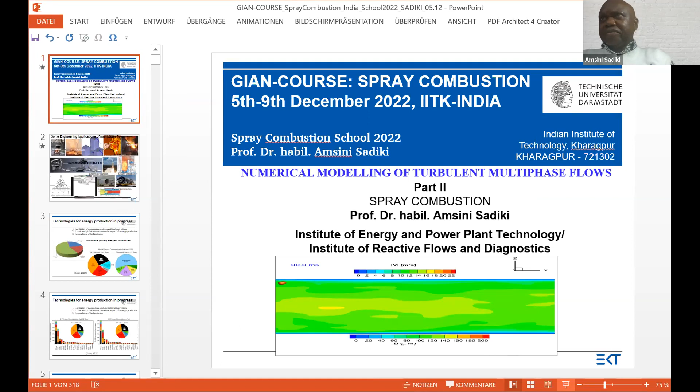I have tried not to present our university here, I think it is well known, the Technische Universitat Darmstadt. If it is wished, I can present it later.

We will focus on the spray combustion school. This school will focus on different topics we have to share together, and I will put at the end also some issues concerning multi-phase flow combustion, not only spray combustion.

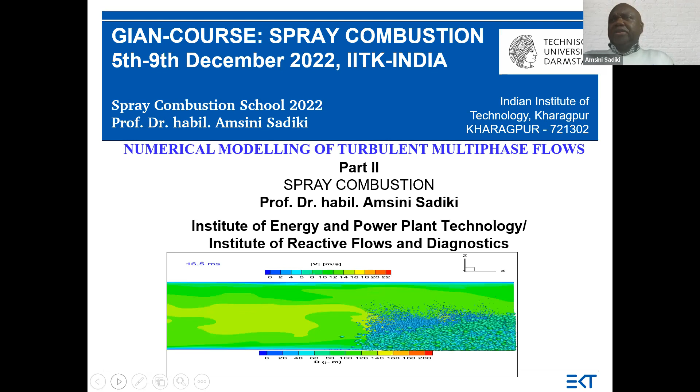Let me start a little bit with this movie here. So we see spray, and from this spray we see that it is a really complex process: from atomization and spray formation, dispersion, evaporation, and also at the end - which I have not shown here - combustion and also some radiation processes. This kind of phenomena can be found in different applications.

We see here, for example, the biomass application. We see also the pollutant formation in the atmosphere and from buildings. We see here also in medicine, in metal processing. We see also here in engine propulsion, in aerospace for steam generation and energy generation, like here for stationary gas turbine and aircraft. And we see here also in transportation on road, in ships, and some other applications, for example cooling processes. So we can find it also in IC engines and also in some kind of after-treatment, exhaust after-treatment.

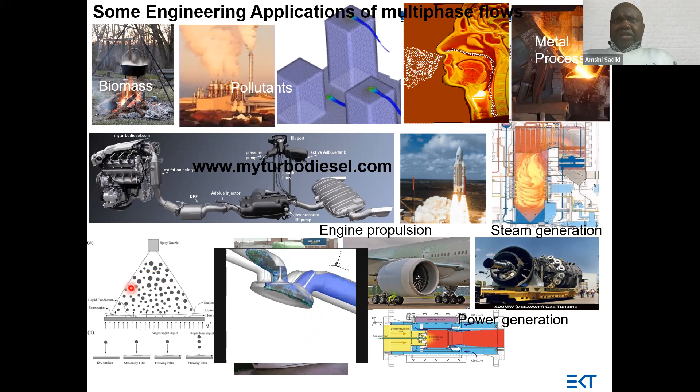So, focusing on energy production, as I said, we see that the resources of energy sources are very limited, and this leads to some problems in the world. You know, there are some geopolitical restrictions, and also transforming these primary energy resources to energy brings also local and global environmental impact, which is related to pollution.

So this led to innovations of technologies, and this brings great progress in this field. So we can see here that the global energy consumption is very high, and if these resources are really limited, then we can see that there is really a problem with this, and that is why at the moment there is some development related to renewable energy.

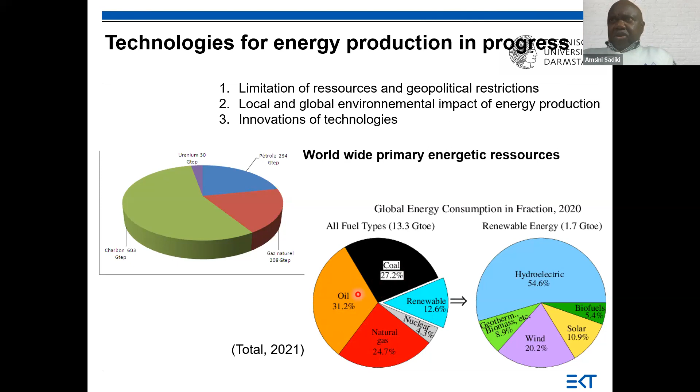So now there is almost 12.6% of renewable energy which is consumed. But the most part, oil, coal, and natural gas, as produced naturally, are transformed by using combustion, and that is what we will show in a few minutes.

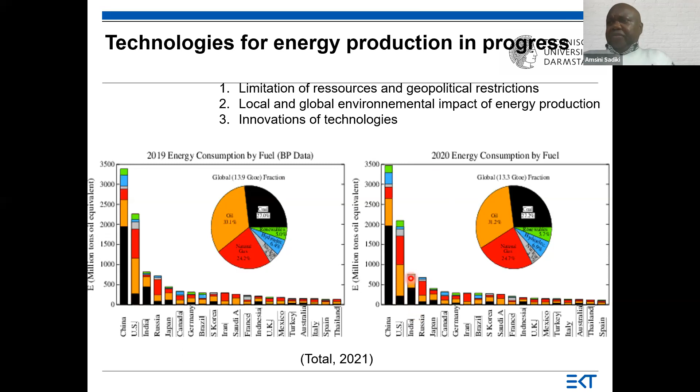So that is a country, and we see that India is also a big consumer of energy, in 2019 and then 2020. So there is a great augmentation of consumption of energy, and this is the energy produced by fuels. And if we put it from 1900 to 2020, so we see that the ratio of production or consumption of energy is increasing.

But to transform this fuel into energy, we need a conversion means by combustion. This means that we have to use combustion to transform or produce energy from this kind of fuels that can be coal, that can be oil, that can be also gas in this area. So we have to use combustion. That is why combustion will remain the main conversion technology with respect to energy production.

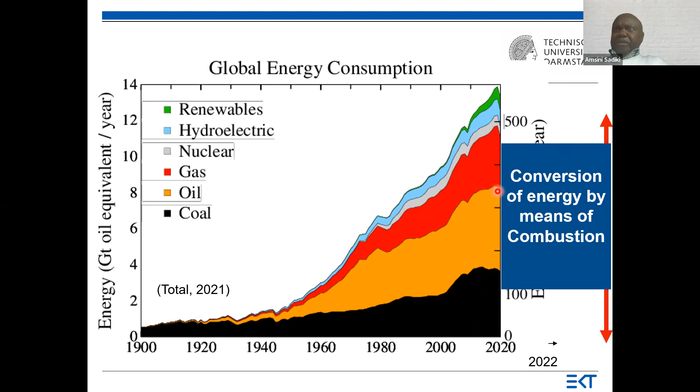And it is why also, if we see here, the percentage of oil and coal, where we can have two-phase flow, is very high. That is why we will focus on this multi-phase flow. So that is what we have seen at the beginning.

So we have 5 days to go through these topics, and we will start today with more general issues of multi-phase flow, and then we will try to characterize spray and microprocesses, using sprays as a representative of multi-phase flow. Tomorrow we will continue with liquid atomization and spray structure, and also try to start with turbulence and turbulent combustion, because the next day we will focus on the phase change phenomena and the mixture formation, which is related to turbulence and is a subsequent process to liquid atomization and spray structure.

Then we will focus on spray transport, interphase coupling dynamics. At the end, Thursday, we will focus on turbulence and turbulent combustion, and also then turbulent spray combustion. And at the end, I will give some examples, some applications, and also the turbulent dispersed multi-phase combustion at the end, but I have not written it here.

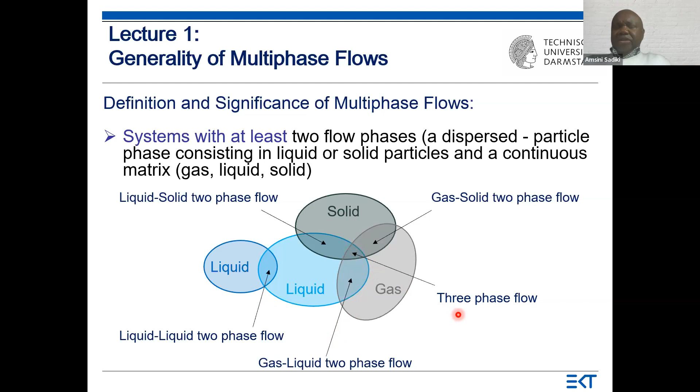Why is this important? So we have economical significance and cost effectivity, because about 70% of all products from chemistry industries are marketed in this dispersed form. It is why this is very important. And at the moment, we have this trend of nanotechnology. And if we look at this production of energy, what we have seen at the beginning of electricity, 4 to 5% of the produced electrical energy is used for milling of particles.

This particle can be solid or liquid. We can characterize these multiphase flows in terms of properties, for example properties of particles: size distribution, the form of the particle, the surface of the particle, and structures, such as pores or whether particles are single component or multi-component. We can also distinguish them by particle motion within the flowing carrier phase, the continuous phase. As we have seen, we have a velocity distribution of particles and fluctuations. We also have some integral quantities for describing particle fraction in the flowing carrier phase. We will introduce the phase volume fraction and the mass loading, and we will find these naturally in various application fields.

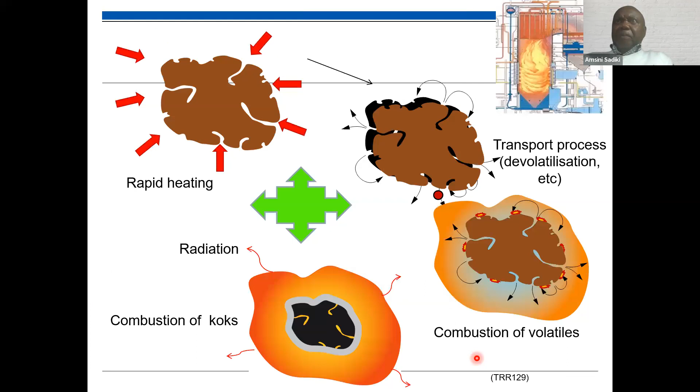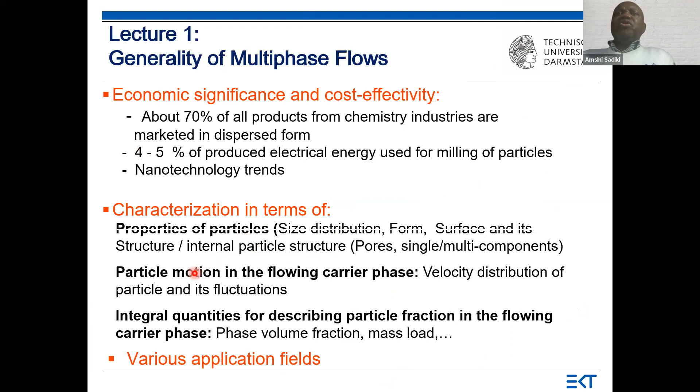This brings me to categorization of flow systems. We have seen the properties of particles. Now I will show how we can categorize multiphase systems based on the particle motion or the geometry of the system. If we have these flow conditions, the interface of the phases and the topology distribution of each phase should be considered when categorizing multiphase flow systems.

For example, at the beginning we have a liquid phase flowing in a laminar flow, and we have a change of thermodynamical properties within it, and then we have gas bubbles forming. If we also have some change in the motion, we can have liquid droplets, and this kind of system is called the transient multiphase system regime.

But we can also have what we see almost everywhere: a gas phase and a liquid phase separated by a clear interface, and this interface can be followed and captured. Here we have large bubbles, and we also have liquid within, gas phase here, and liquid flow here. We can still follow and track this interface, and in this case we have the so-called separated two-phase flow regime.

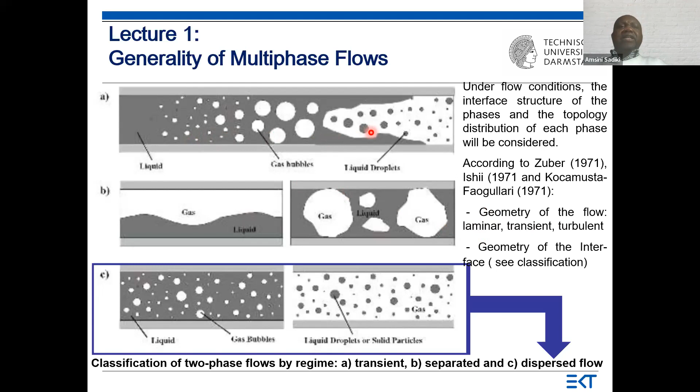Based on the flow characteristic, we will speak about laminar, transient, and turbulent flow. We will introduce the Reynolds number of particles and some other non-dimensional numbers to characterize these two-phase flows. Here are some applications.

If we have multi-phase flow in industrial and technical applications, we can find this series of compositions. So we have gas-solid flow, for example, as made in pneumatic conveying, particle separation in cyclones like this one, filters, and fluidized beds.

We have also liquid-solid flow, as in hydraulic conveying, liquid-solid separation, and particle dispersion in stirred vessels.

We have also gas-droplet flows in spray drying, spray cooling, as I have shown you before in one example, spray painting, and spray scrubbers.

We have also liquid droplets, if we have mixing of immiscible liquids or extraction in the chemical industry. Liquid-gas flow as we found in bubble columns in some power plants, aeration of sewage water, and flotation.

But to be very concentrated on one application, we will focus on turbulent spray combustion. And at the end, we will show also some other applications related to turbulent solid combustion.

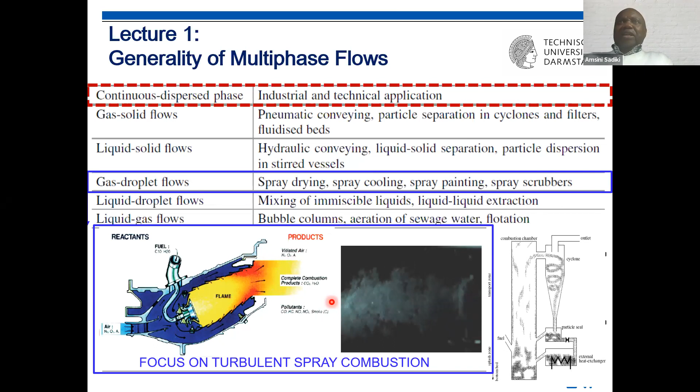So this is what we will focus on, and the question is why. We will focus on this because spray combustion is a powerful method of burning relatively involatile liquid fuels.

Why will we focus on liquid or solid in the multi-phase context? Because there is ease of fuel handling, and we can store them much easier. Also, they have a high energy content. All these properties make liquid fuel and solid fuel very attractive for many applications.

And in this area, in the application of energy generation, this is very, very interesting. We can find this application, for example, in transportation purposes: diesel and gasoline engines, heavy engines for road vehicles and ships, and also in aviation, marine and land-based gas turbines, and in space rockets, etc.

And what is the fundamental process here? We have liquid at the beginning, and the key process is the disintegration or atomization of this liquid to produce a spray of small droplets, increasing the surface area so that the rate of heat and mass transfer during combustion are greatly enhanced.

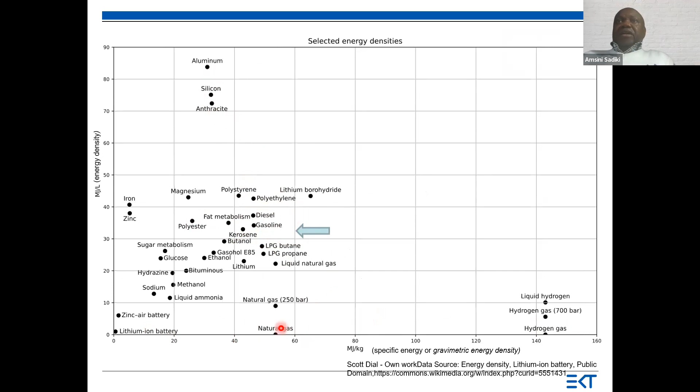And we can now say that because spray formation here is the key process, it plays a strong role, or it influences the mixing and consequently the combustion process. So the combustion process we get here is different from what we found in gaseous combustion applications. This influence is very critical in the spray system, and it is a challenge to optimize the combustion process.

And for that, we need also spray simulation tools, which are able to support such kind of development or optimization. Here I show you a short example. So we have our burner here.

So the spray is spraying, building what we have seen before, with different regions. We will see now these regions: we have small droplets, they evaporate, and this evaporation builds the mixture. This mixture reaches the stoichiometric condition, so that we have this kind of flame, which is different from what we know as a premixed flame or a diffusion flame. And that is exactly what I told you before.

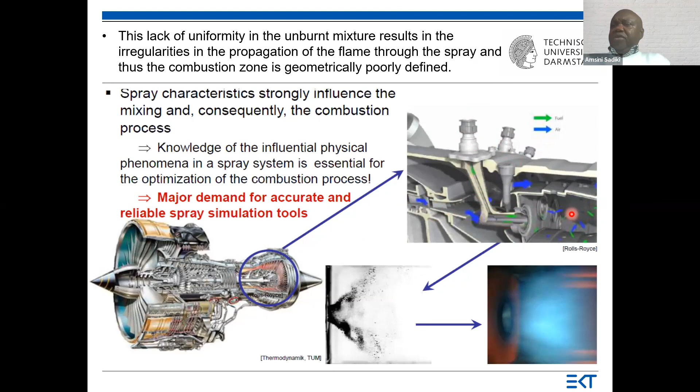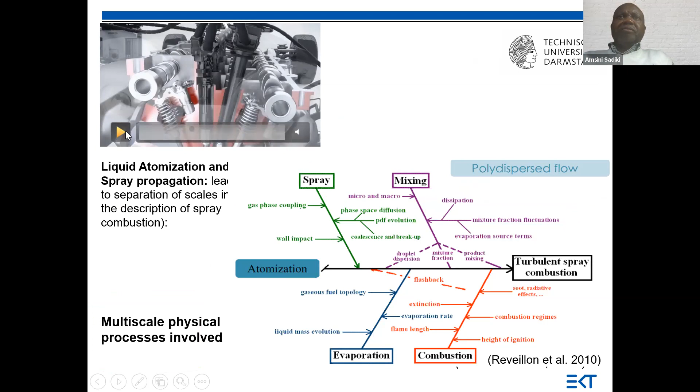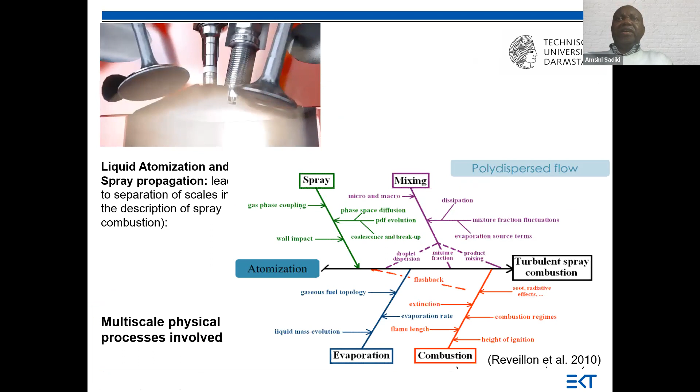We have fuel and air which come from the compressor. The fuel enters here, and we have the formation of mixing within this combustion chamber. The phenomena that take place are atomization, primary and secondary, dispersion, and other processes. I show this for the gas turbine, and we can see the same in the case of IC engines. So we have formation of spray, mixture formation, and combustion of spray.

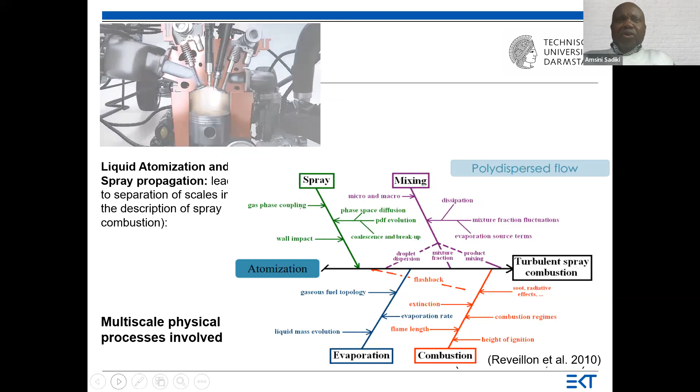The key process, as I said before, is liquid atomization and spray propagation. This leads to separation of scales, which is helpful for describing our process. We are dealing with a multi-scale, multiphasic process.

As we can see in this fine diagram proposed by Reveillon in 2010, we have the spray which is atomized and builds up at the beginning. Within the spray we have coupling of spray with the gas phase, phase space diffusion, PDF formation, and evolution of these droplets. We have coalescence and also breakup, primary and secondary, and we can also have interaction of the spray with the wall, leading to mixture formation.

During this mixture formation, we have micro and macro mixing, droplet dispersion, and formation of mixture fraction, which we can track by defining some mixture fraction. We have the product of mixing, and turbulent spray combustion at the end. This combustion has different properties, and we can follow the mixture by describing the liquid mass evolution.

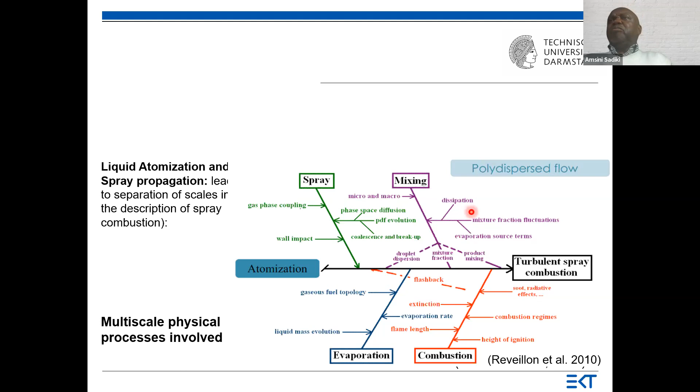I say that we focus on dispersed flow, and I call it polydispersed because the size of droplets within the system is not the same for all droplets. We have not to deal with monodispersed flow, but with polydispersed flow, as I showed you at the beginning.

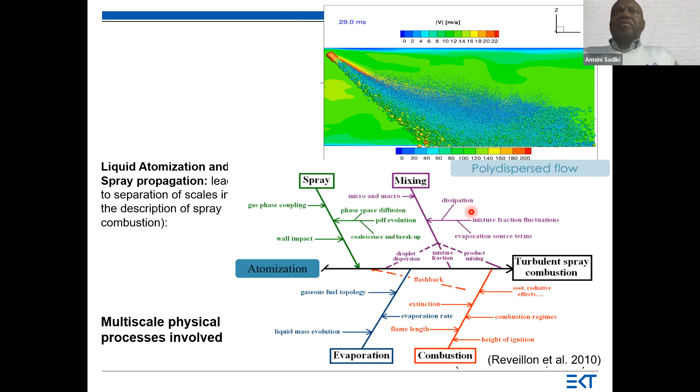Which kind of atomizer we use will be seen in the next chapter.

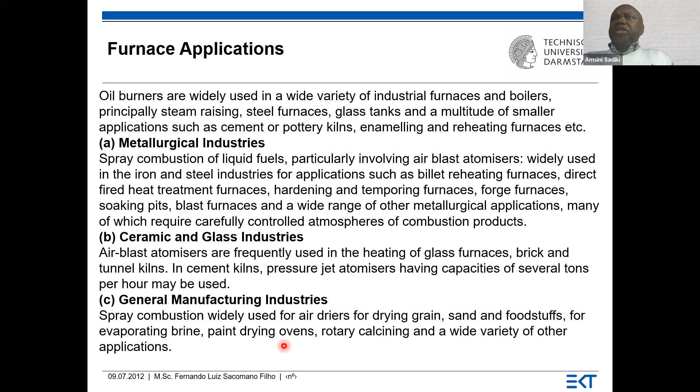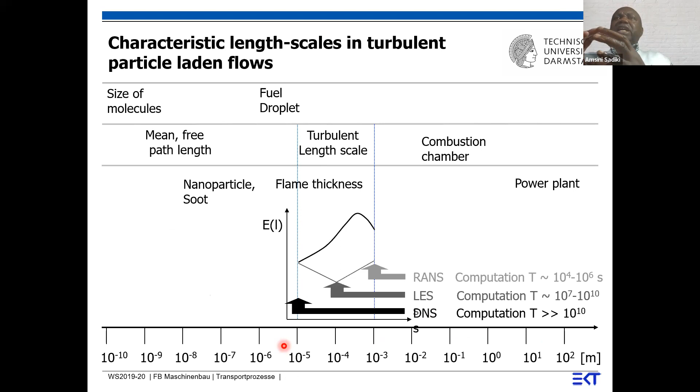As I told you before, through disintegration and spray atomization we generate different sizes of particles. These different particles of different sizes are flowing within a turbulent flow, and within this turbulent flow we have also different scales.

We have the fuel droplets, which are in this range of magnitude, millimeters, micrometers. We have the turbulent length scales, in this range of magnitude. The flame thickness is on the order of millimeters. The combustion chamber itself has this range of magnitude, and the power plants are very large, 10 or 100 meters.

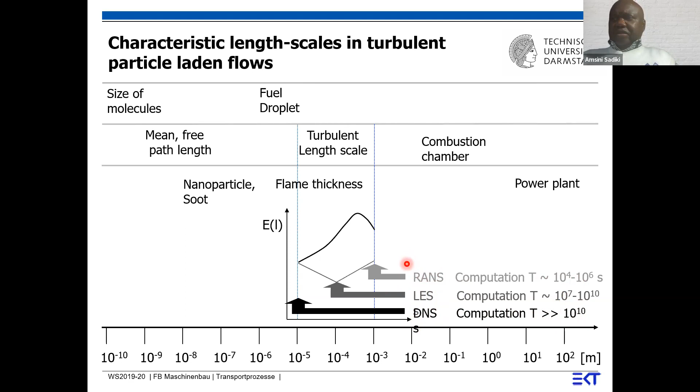It is why we will focus - I will show you some DNS results, I will focus on LES and some examples of RANS. But for that, we need to move now to the next part to characterize our spray and see what kind of microprocesses take place within such processes.

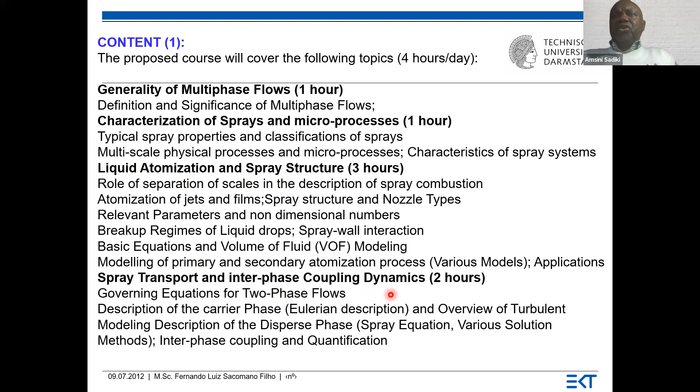Going through these different chapters, we will start with the characterization of sprays and microprocesses. I made a slight modification here, and liquid atomization will follow this. After that, we will focus on transport and inter-phase coupling dynamics, and then continue at the end with turbulent spray combustion.

We'll focus on numerical description techniques of turbulent dispersed spray or solid combustion, and different methodologies - Eulerian Lagrangian, and also Eulerian-Eulerian. We'll go through different modeling approaches, and I will show you how we can use PDF modeling approaches to describe multiphase processes and multiphase flow combustion.

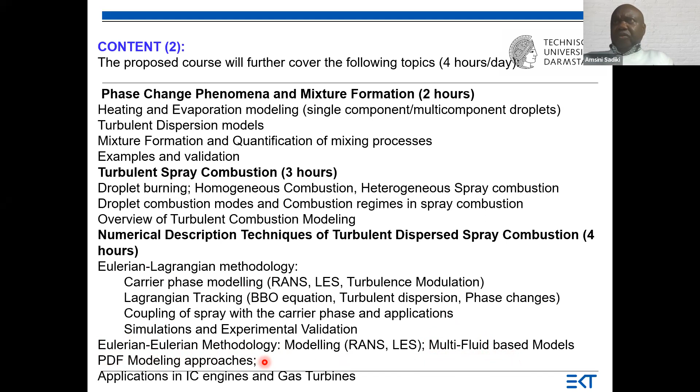Some remarks: we will have this lecture in 16 hours, and the objective is to teach you especially the fundamentals of spray combustion. At the end of this lecture you will be able to identify the role of the interacting multi-scale processes that govern spray evolution downstream from the near-injector atomization region in liquid fueled combustion systems, and you'll be able to choose a suitable method for numerically simulating spray propagation, evolution, and combustion, including interaction between spray and wall.

You will also be aware of the experimental validation issues, because I will speak about comparison of numerical and experimental results. And we'll speak about the modern approaches in the field of turbulent spray combustion or turbulent spray combustion.

I am sure that you have the correct prerequisites in continuum mechanics. By continuum mechanics I understand also thermodynamics and some idea about turbulence modeling, but you will get a recall of these in lectures by Professor Schocker, and you must have, I think not deep, but some background in combustion.

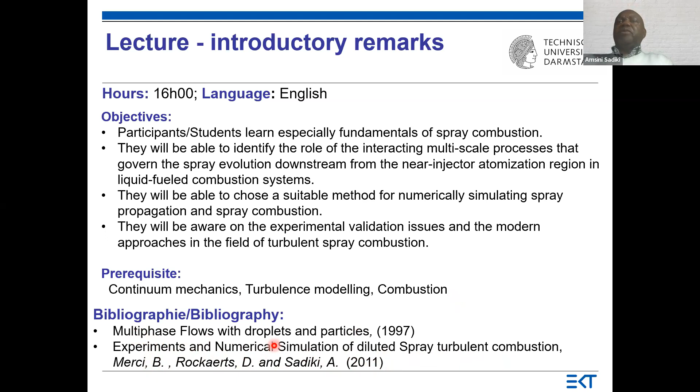For bibliography, I use our book: Experiment and Numerical Simulation of Dilute Spray Turbulent Combustion, written in 2011 with Dirk and Bart Merci. We also use Multiphase Flow with Droplets and Particles by Crowe, Sommerfeld and Tsuji, and Fundamentals of Spray Combustion by Mashayek, as well as some lecture notes on multiphase flow from myself, Martin Sommerfeld and Tsuji, and our 2018 review on primary atomization in propulsive devices and fuel injectors.

So here I show only how we will speak, what we will speak about. We will speak about spray atomization, spray formation, and mixture formation, and also the result of this mixture formation, and chemical reaction and combustion.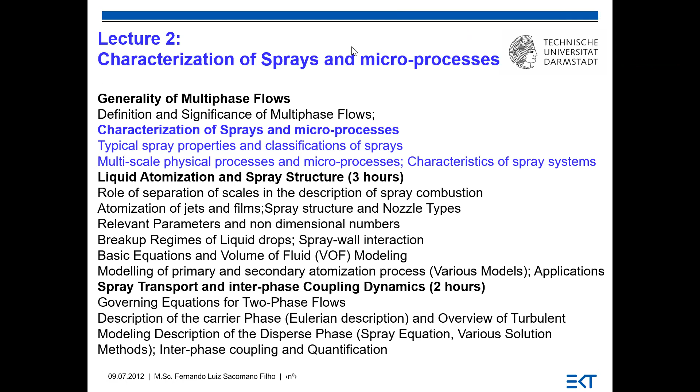So, yeah, there seems to be no question. So, Professor Sadiki, you can continue. Yes, I see here that there is a question.

Can we get the presentation file at the end of the course? I will send it today, and you will get the first part today. The next part we will get tomorrow at the beginning of the lecture, so that you can follow and perhaps put some comments in the files.

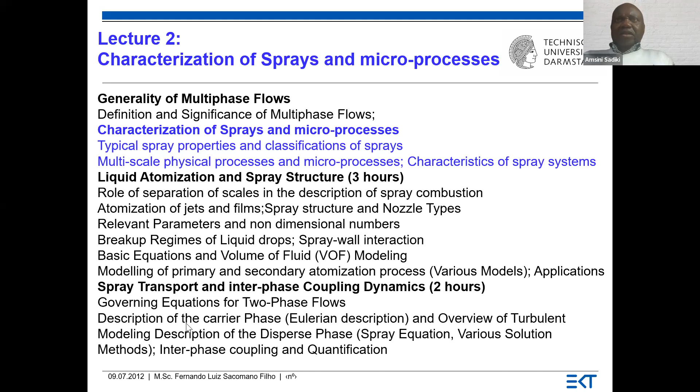Let's now focus on characterization of multiphase flow. So we have our configuration here: the spray, the liquid is spraying here, and we have a formation of disintegration.

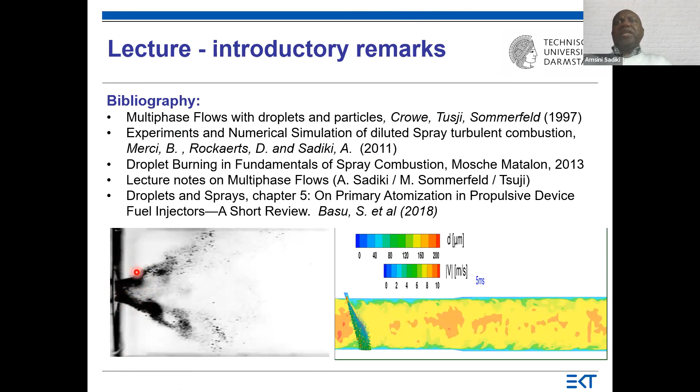We have the disintegration process and the involvement of this process, and we take a small control volume and zoom in to see what is there. We see that it is a polydispersed system: droplets with different sizes, and the gas, which transports or carries these particles. We'll try now to describe this control volume, this system here.

This will help us to understand some things and to speak the same language during this lecture. The first thing is to introduce the volume fraction of particulate phase. I call it particulate phase because this may be solid or droplets, but in this case it is represented by droplets.

So we define this as alpha P, and this alpha P I will call also later phi or pi. It is the volume of the particle divided by the total volume. So the total volume of particles is the volume of each particle multiplied by the number of these particles, summed, and divided by the total volume. We'll do some exercises in which we can see it more clearly.

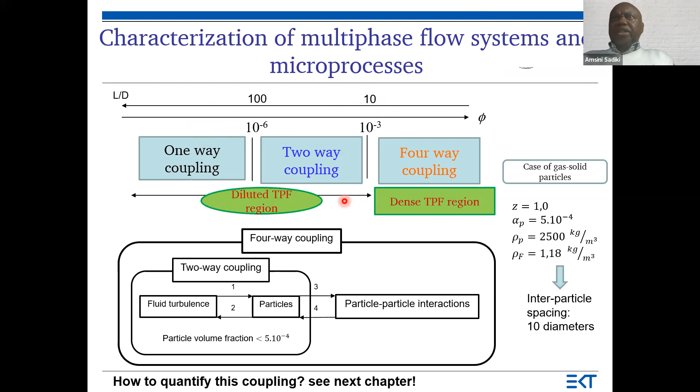This will be seen in the next chapter - we will see this now. This is what we will try to quantify here.

We have the fluid phase or carrier phase, and we have the particulate phase, or droplet phase, or particle phase, and there is interaction between them. Because of this interaction of phases, the phases carry some physical quantities - mass, momentum, and energy. They can also be entropy, or moment of momentum, but here I restrict to these three: mass, momentum, and energy.

Because the particles in the fluid carry these kinds of properties, we have interaction with respect to mass, momentum, and energy. So we can add this complementary information: dilute two-phase flow, dense two-phase flow, one-way coupling, two-way coupling, and four-way coupling. We have spoken about two-way coupling here, but it was not really clear.

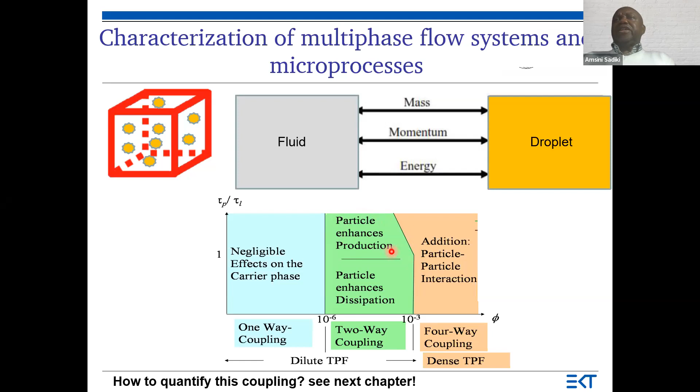And if it is so, this means we have a reduction, or rather an augmentation of the interaction between particles, so that this part will enhance the region of particle-particle interaction. That is why we have this corner here to say that in this case there is also augmentation of particle-particle interaction. That is what I'd like to show.

This comes later, and we can put this together. So we have one-way coupling: the particle follows the fluid phase. We have the two-way coupling: the particle influences the fluid phase, and the fluid phase influences the particle.

And we have the four-way coupling, where we additionally have the interaction between two particles. It was difficult to classify, but we also have the so-called three-way coupling. This is due to the fact that we have two particles.

The first one interacts with the fluid phase and modifies the fluid phase. This one modifies the fluid phase, and we say that this modification also implies modification of the interaction. This influences that, and that influences this - then we have the three-way coupling.

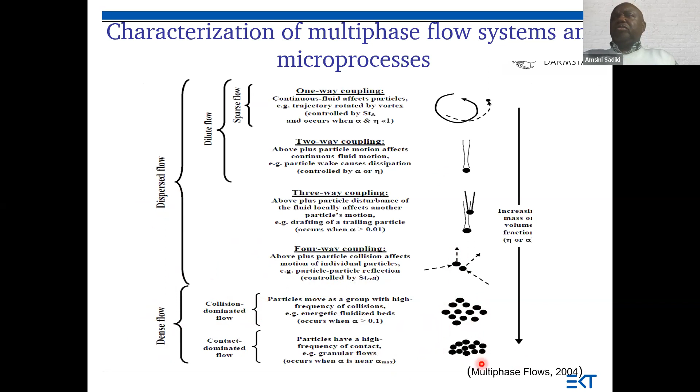So let me now come back to the quantification of these two-phase flow effects. To quantify these effects, we have to introduce some properties, given by the so-called dynamic relaxation time, as I introduced before, and we will have the possibility to define it correctly. By defining it, we will come back to the ratio of the characteristic times.

So we consider that the particle, to be moved, needs forces applied on it - the first one is the drag force. The other forces will be seen later when we characterize the motion in a general way of a particle within the carrier phase. Let us consider only the drag force: this is the drag coefficient. In the volume, we have a mass multiplied by this quantity, and we have the relative velocity.

I will show you how we got this relation in a very nice way. At the moment we can only accept this, so we get this expression. We have a coefficient here, a parameter - the drag coefficient - and the relation of relative velocity: particle velocity minus fluid velocity. We assume our particles are solid particles, and we can put them into this expression.

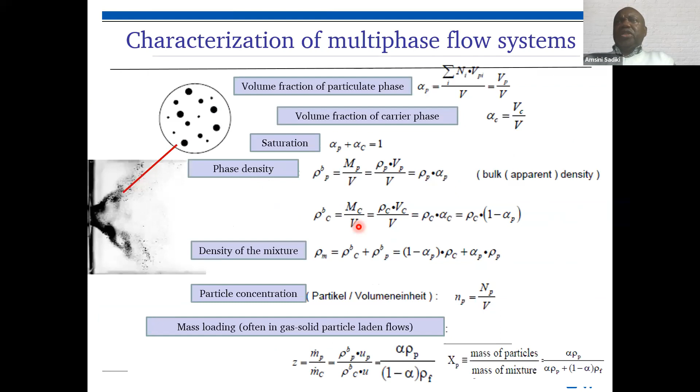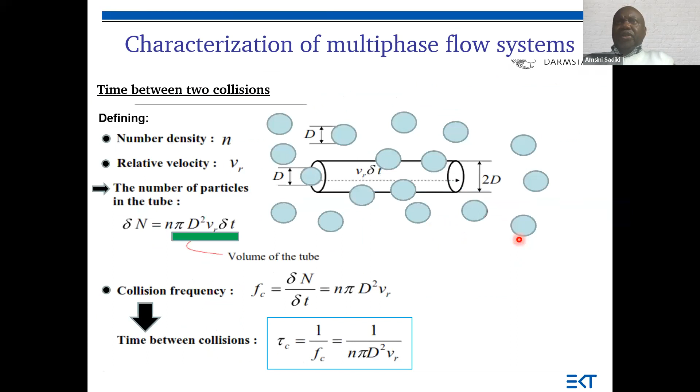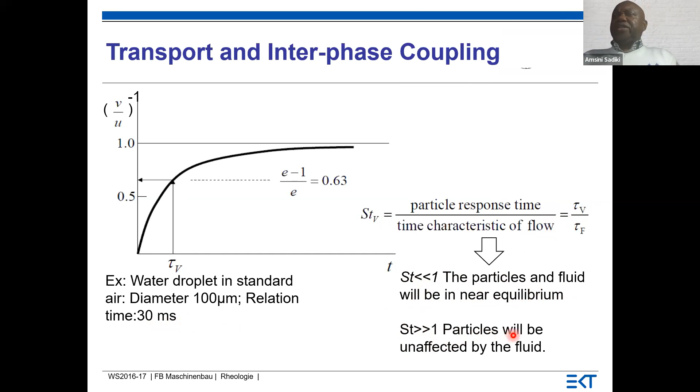And we see here, the Stokes number is related to the momentum, that is why I changed the indices here. So the particle and fluid flow will be near equilibrium, and the particle will follow the flow. If the Stokes number is larger, the particle will be unaffected by the fluid flow, as we see here from tracking the particle trajectory.

So if we have this, we can also introduce another kind of interaction. This is interaction based on momentum. And let me now focus on this interaction based on, if we have phase change, for example, particle evaporation.

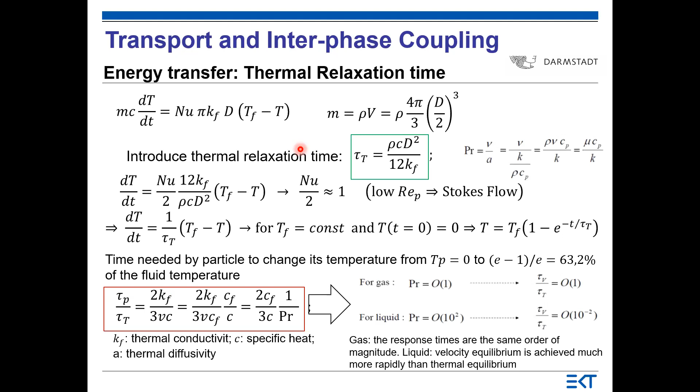And I think it is perhaps time. I don't know, let me know if I can continue or if it's time to close this session. You can continue for another 10 minutes and then take up the question and answer. If it's okay with you, we can go a little beyond that, that's not a problem. So 10-15 minutes, you can go ahead. We have 3 slides to go through, and it can take 10 or 15 minutes.

So if we have phase change like an evaporation process, what occurs there? We have a particle, we have the heat, which is flowing, which is provided to the particle. And we see that the temperature of the particle will change.

And we have a liquid phase, the particle. The heating process will take place within the particle, and some quantity of species will go out. We have the evaporation rate, and here we have some species which will be evaporated from the liquid phase.

So if we have this, what is the process? We have first the heat transfer process, and we have also the heat conduction process. So in the continuous phase, we have the Fourier law, in which we have the thermal conductivity, we have the gradient of the temperature, and we can write this Fourier law for heat conduction.

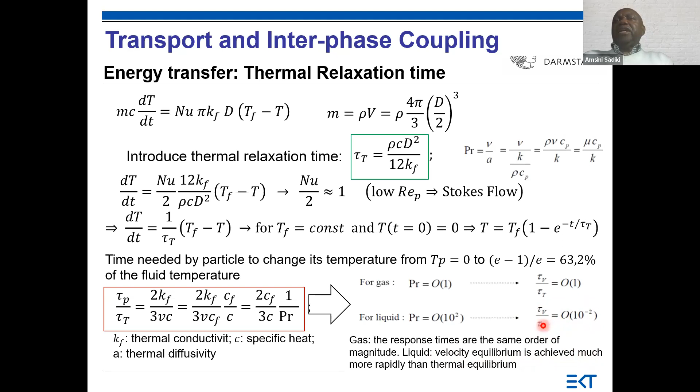So we have these two kinds of relaxation time: the dynamic relaxation time and the thermal relaxation time. These two quantities will help us to quantify correctly the coupling - the mass coupling, the momentum coupling, and the energy coupling.

So let's suppose - I think you will stop me if it is needed. I continue. Yeah, wherever you can bring it to something, then we can take up the questions and answer session. Yes, I think here it is a very good location to stop.

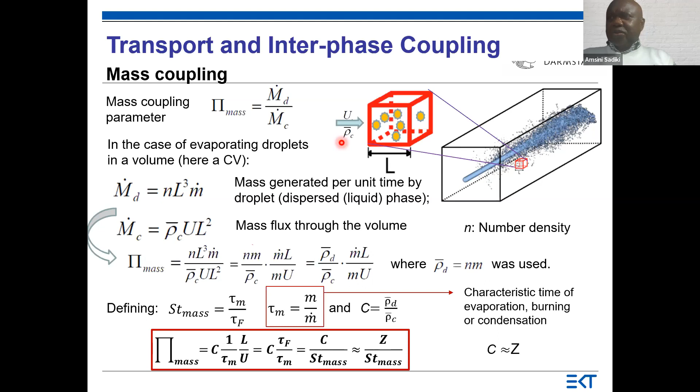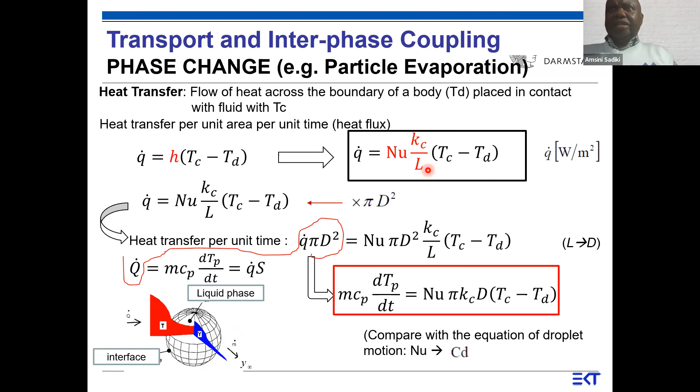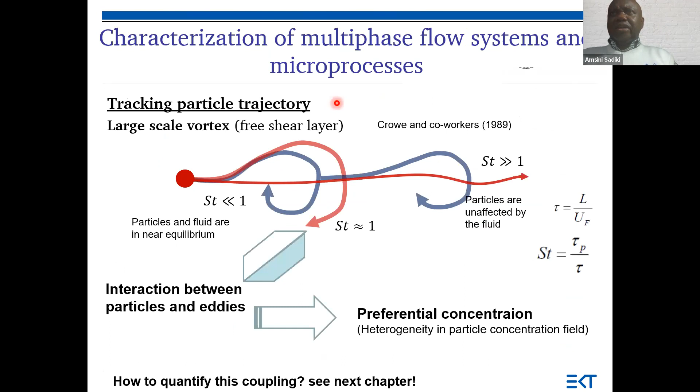The L I introduced here - let's come back first. I don't understand which L you are speaking about, because we have this one. This L is a clear length scale of the system, but the L we introduced before is the interparticle spacing, and this diameter. But what we introduce here is only a length scale of the system, because we have here the gradient of the temperature, delta T divided by delta X, and this X is a length, and this is what we have here.

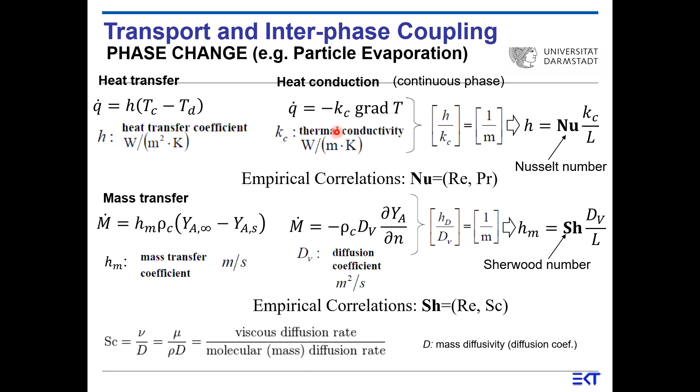This L is - so there are a number of length scales, smaller scales are there, and also larger scales are there. So my question is, which scale are we using here actually? This one is the integral length scale.

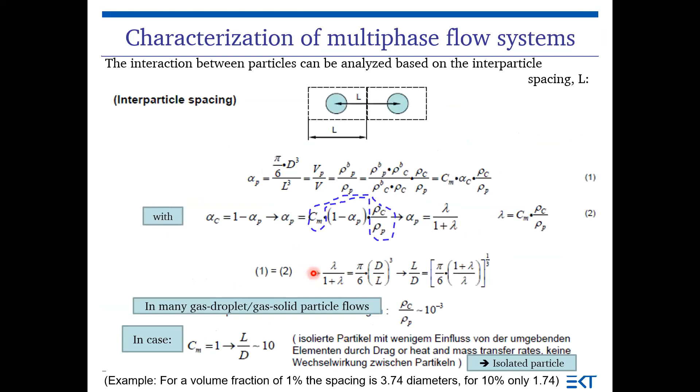Okay, thank you, that was the question. Okay, but you had another question. So the other question is, when we are considering the static particle, like zero velocity particles introduced into the flow, then the Stokes number will predict whether they will follow the flow or not.

But if the particle had some initial velocity that is perpendicular to the flow, then how does this concept apply, like particle flow followability? That is my question.

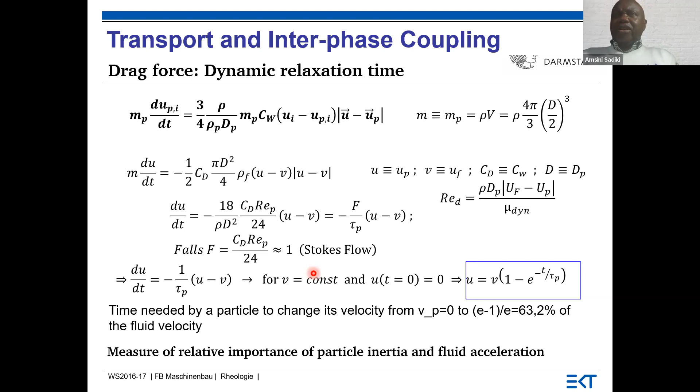It depends only on the diameter of the particle? No, it doesn't depend only on the flow velocity of the droplet, it really depends on the ratio of the relaxation time of the droplet divided by the fluid relaxation time. If this Stokes number is large, as we had here, then the particle doesn't follow the flow. If it is very small, it will follow the flow.

So now it depends on how to express this following the flow. If we have two different velocities, like in jet in cross flow, we see that the particle will follow the flow if we look at the evolution or trajectory of the particles. At the beginning it is not really so, but after that it will follow the flow.

Okay, thank you, Ashutosh. So all your queries are taken care of, right, Ashutosh? Yeah, yes, okay, absolutely, thank you.

Neha, I would allow you to talk, you can unmute yourself and pose your question. Hi, good afternoon, sir. My question is for the same slide.